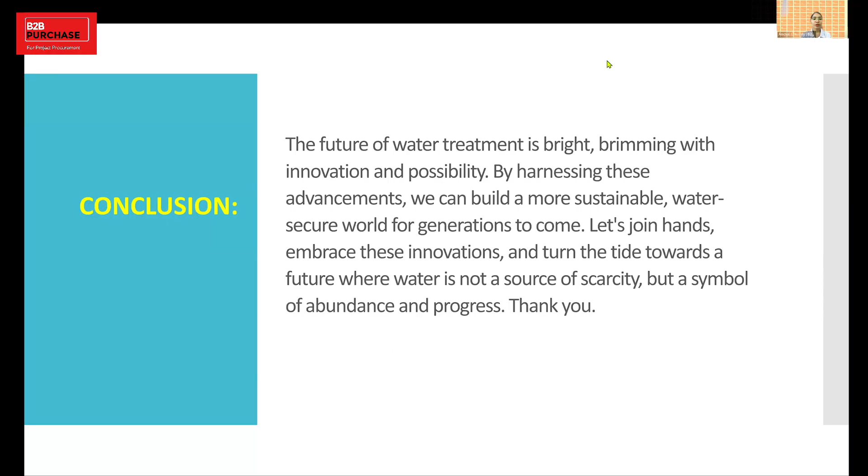So let's welcome Mr. O. Vishveswaraiah. He has over 30 years of experience in water supply and infrastructure development. He has handled large projects of water supply, cross-country pipeline, urban water supply management, water treatment and sewage water plants, irrigation projects, industrial and commercial building constructions, roads and bridges, hydropower and 24/7 city water supply projects.

He has done civil engineering with masters in structures and has been working for SPML Infra Limited for almost 28 years, managing urban water supply projects in 66 cities in Karnataka, along with other water supply projects in South India. Mr. Vishveswaraiah will speak on water loss management for resilience and sustainability. So let's welcome Mr. Vishveswaraiah.

SPML is a leading infrastructure company which is doing pan-India water supply related works. We basically undertake government contracts, and we give end-to-end solutions from the source to the distribution, which includes treatment plant, pumping machinery erection, water management. Water loss management is a topic that we have selected because conserving water and improving the revenue of the local bodies is the main target.

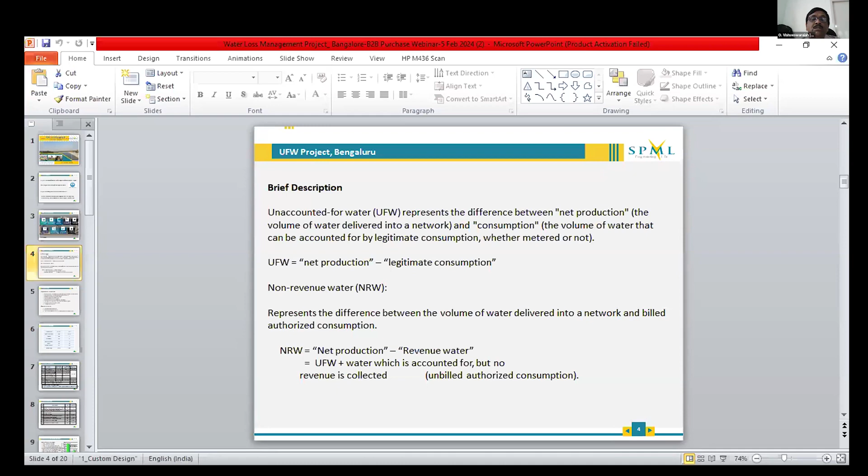So the main jobs that we did: we ascertained the assets, did the topographical survey and house-to-house customer consumption surveys. We updated all the assets which were never there in the records. Historic leaks we updated on the GIS. We did network modeling, and DMA design, DMA testing and establishment. Then execution of mandatory works: any pipeline below 100 millimeter was removed, and we had to establish a minimum of 100 mm DI pipeline in the city network.

Then we established the base level of unaccounted water and leakage level. We divided this entire area into DMAs, and we could assess the level. Then leakage control and UFW reduction plans, and establishment of the final UFW level. Our target was to bring down the UFW level to 15%. After this, we have 5 years of operation and maintenance, and we need to hand over to the department, so training was to be imparted to them. There was an EPC contract for 3 years and an O&M contract for 5 years.

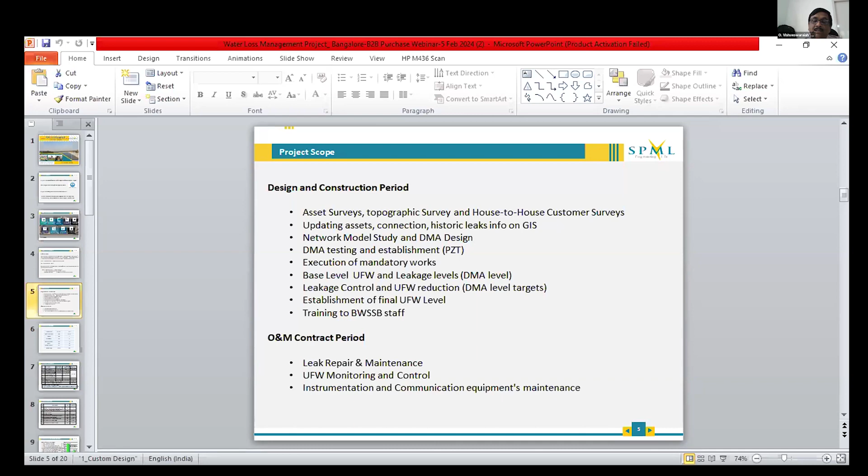In the O&M, we had a huge network of 756 kilometers, where we do the repair and maintenance, UFW monitoring and control, instrumentation, and communication equipment maintenance. These were the main issues. The project area was 26.5 square kilometers, thickly populated. Number of connections was 89,159. We had 3 divisions, 6 subdivisions, 15 service stations, and 43 DMAs. Network length was 756 kilometers. Average network age was more than 40 years.

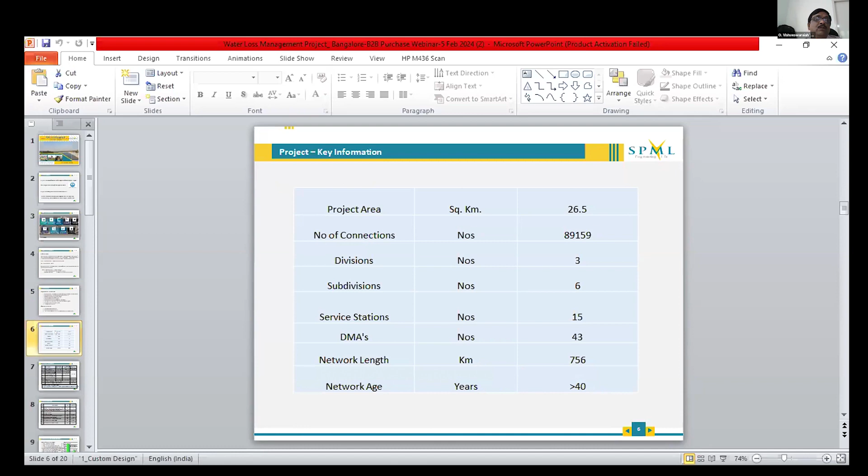Now, how could we save this and make this benchmark for the next projects to take over? See, when we established the base UFW in 2017 and presently in May 2023, you could see the net inflow we were drawing was about 4,117.64 ML. After we did the UFW project, we could reduce the intake level itself to 3,400 for serving the entire population. That means there was a net saving of

716.45 ML per month. The consumption, you can see at the base UFW in March 2017 was 1,911, and consumption has increased. The consumption is what gives us the revenue. Earlier, the consumption was only 1,911. Now it has enhanced to 2,719 ML. That means the more the consumption, the more the revenue. Earlier there were stand post consumptions. That also has been reduced. Overall, you could see this.

We could save 1,533.51 ML per month. That means on an average per day it is 51.12 ML per day. So this is going to save us 78.36 crores per annum, which means the project payback is within less than 3 years, considering the cost of production is 42,000 Indian rupees per MLD.

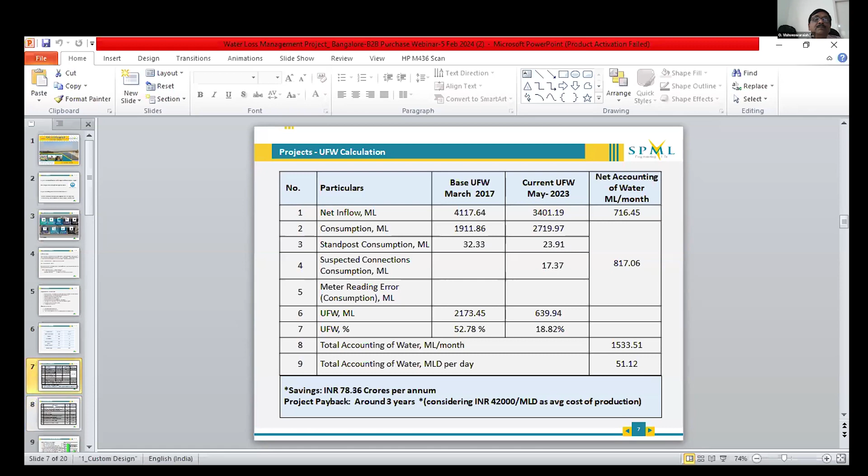So these are the highlights of the project, where we had 43 DMAs, and the consumer survey we have done is 89,159. Laying of DI pipeline was mandatory, as I earlier mentioned. Any pipeline which is less than 100 mm was replaced. Earlier they had PVC pipelines, which were all replaced by DI pipelines. Then we had the transmission mains of MS pipeline, 10.4, to augment the supply. Then 20,000 house service connections were replaced because they were old and we could see that a lot of water losses were there.

Installation of district meters, DMAs, in 113 numbers we have done. Consumer water meters, we replaced 22,833 numbers. Leaks attended are of 2 types. One is a visible leak which surfaces on the earth, 15,741. One is the invisible leaks. These are mainly due to the cracks around the pipeline, and it doesn't come on the surface. This is called hidden leaks, which we attend with the new technology, which I am going to explain to you in detail. So there were around 1,852 numbers we attended in the span of 5 years.

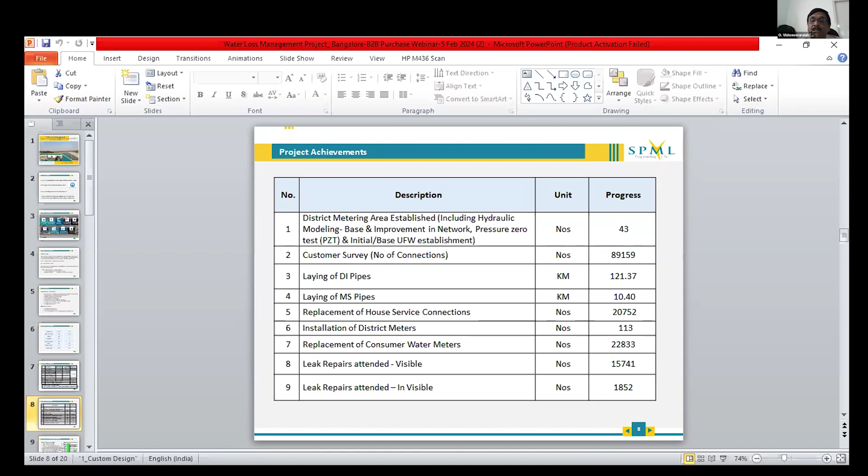Now, if we look at the graph of whatever we have saved versus what was the consumption, the average initial UFW, when we took the survey, when we took the project, was 61%. That means if we were pumping 100 liters of water, the UFW was 61%. That means accounting was only 39 liters. But when we established overall, after doing the entire survey, we could regularize on an average of 52.78%. That means more than 50% of the treated water which is pumped, which has a cost, was going directly inside the earth.

Now the present level, when we completed the 5 years of O&M, was accounted at 18.82, which is a significant reduction. And the present volume of water accounted, that means what we are saving per day, is 51.12 MLD. So we could see in the graph how much we could save. This shows 51.12 MLD of water. This can be utilized for other areas where you are unable to supply the water.

So in this, what we have traced out, which is naturally visible, is unauthorized connections. People were drawing water without taking a legal or regular connection; 5,981 were detected, and we have regularized that. Number of connections rectified and disconnected, that means some people who had illegally taken the connection were disconnected, and number of connections to be regularized, that means we have identified them and the department is going to regularize them. Meter abnormalities, where the meters don't function properly, we also identified, and we have given these numbers.

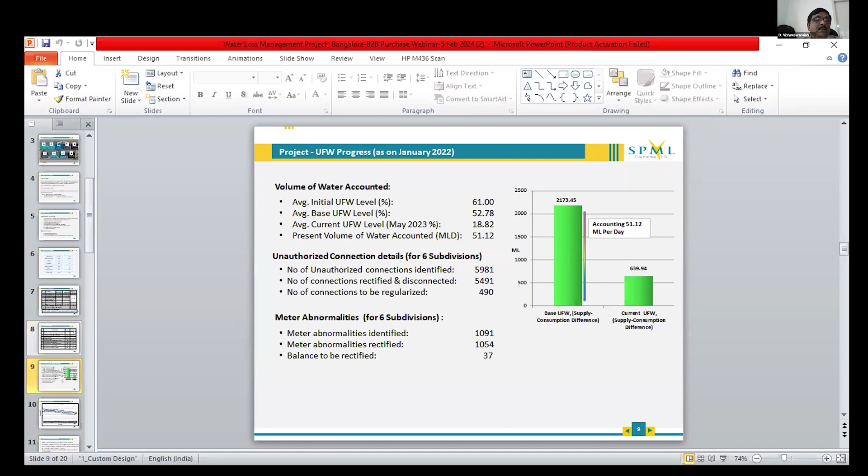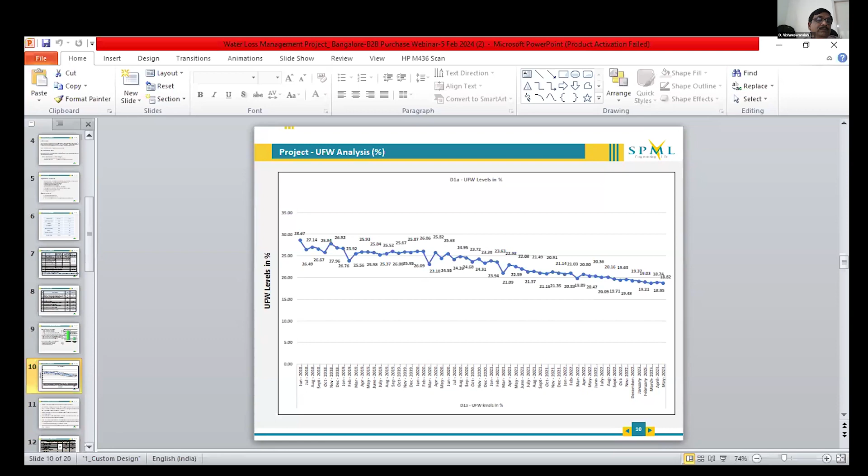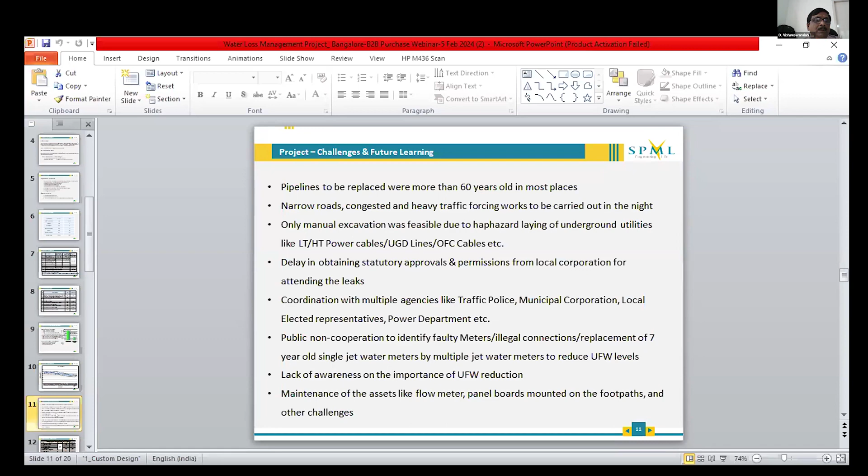So you could see from this graph itself, in the first area, 72.56% was the UFW level, which we have brought down to 11.28%. These are the number of DMAs that we are telling, 43 DMAs. 64% to 27%, like this.

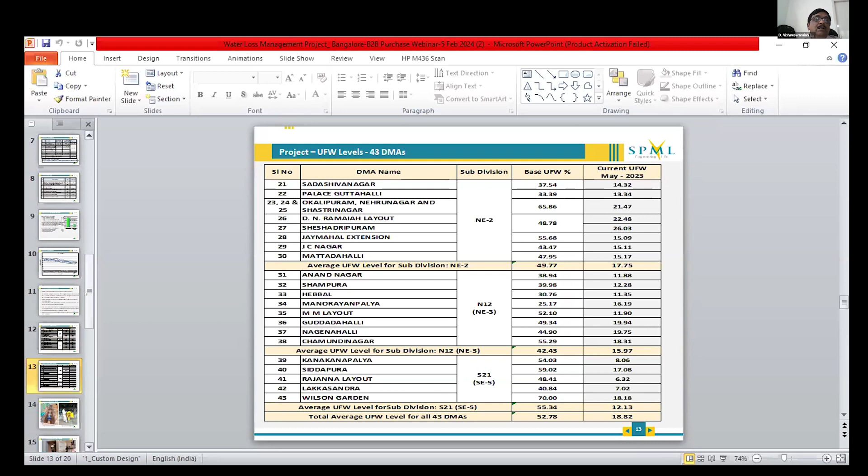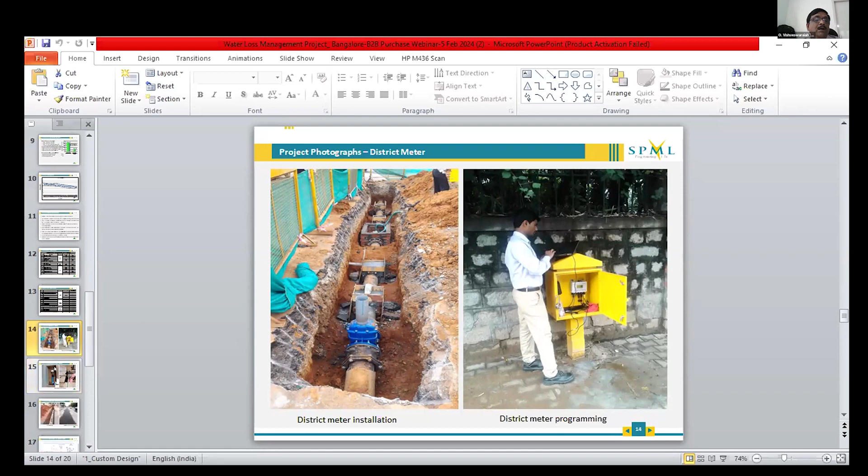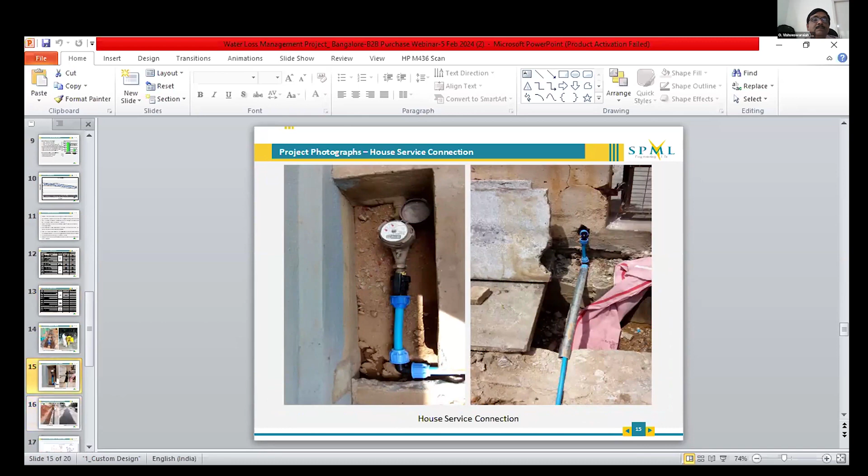So these are the EMF meter installations, where we can measure the inflow and the outflow of the water, and find out the difference. These are the water meters that we are installing. This is the road connections for installations. This is the MS pipeline that we laid in the busy roads for augmenting the water.

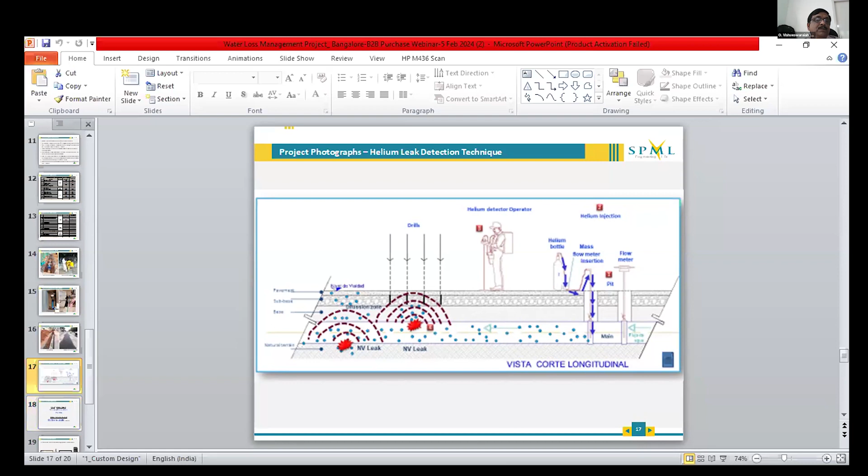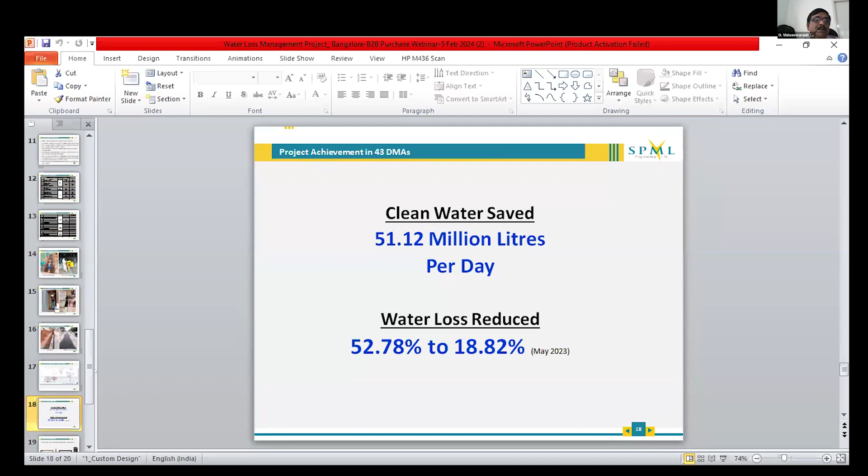So this is the total live project, which was saving 51 MLD per day, and the water losses have been reduced from 52.78 to 18.82, which is recorded and documented by JICA and the client BWSSB. For achieving this, SPML has received 2 awards. It is the first of its kind in the country, and it was a pilot project. We received these 2 awards for achieving this success in a congested, unplanned, hardcore central city.